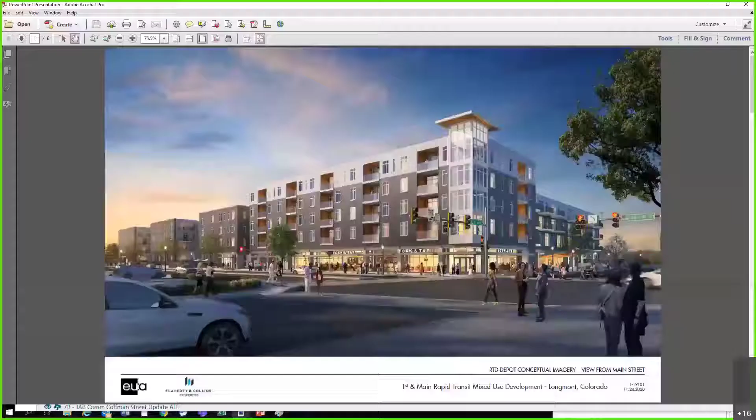So what you received was a packet showing some examples of how we would like to see the development. What we are proposing is that the parking garage actually would be wrapped by residential and/or commercial development, a mixed use project. We have been talking to prospects in regards to that, and this just represents one vision of what possibly could happen at that particular location.

So we'll go through them real quick. This is a slide if you're looking to the southwest at Main and First. Next.

So as you noticed on that last slide and this particular slide, basically you do not see the transit facility. It would have ground floor commercial.

This slide shows what it would possibly look like along Coffman Street. And as you note there on the ground floor, you can see the bus facility that is embedded into the development project itself.

Next. This kind of gives you an aerial view of how the parking garage would work in relationship to the development. Just another angle.

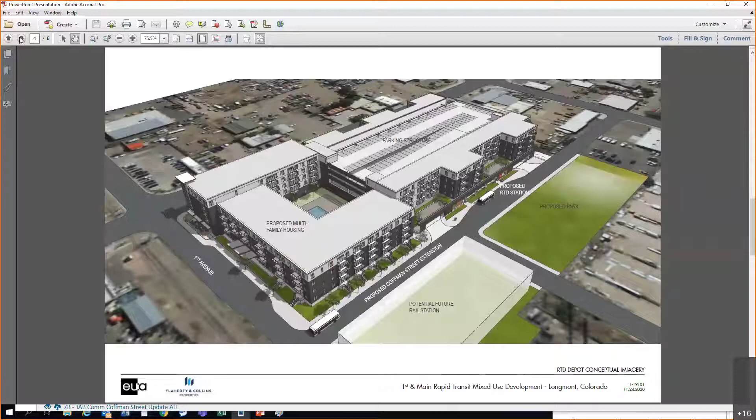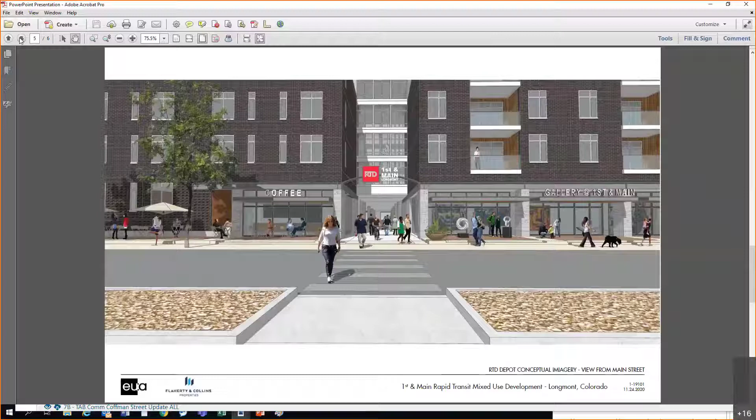And this actually is a section of Main Street showing a midpoint crossing where there would be a portal where you could get to the bus terminal without having to go to either First Avenue or Boston. You could actually enter at midpoint in the development itself. And that's just another perspective of what that might look like.

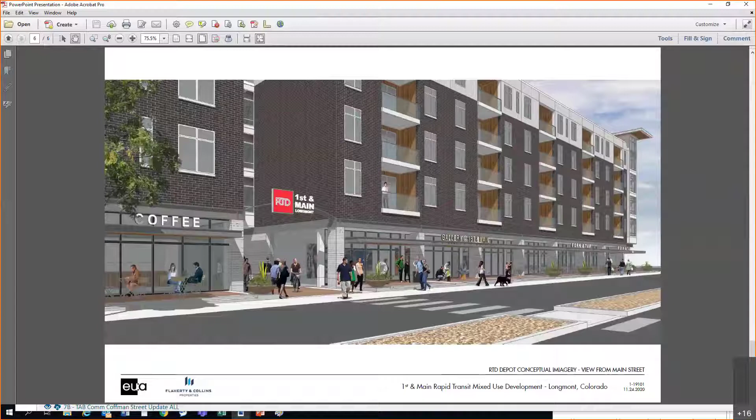Next, that might be it. So Tony's getting rid of all the traffic on Main, which is nice too.

Just kidding. Well, under this scenario, apparently we don't have parking either, but part of the plan would be to reinstate parking on both Main Street and also provide on-street parking along Coffman Street. So that just gave you a perspective of what we would like to achieve from a city standpoint.

We believe it's very important that we don't end up with a standalone parking garage, especially in the redevelopment area around First and Main. Our interest is really stimulating new development activity, and we believe that this particular project could basically serve as a catalyst, in conjunction with the South Main Station project that was more recently completed, to really drive the progress of development in that corridor.

So with that, I'd be glad to answer any questions you may have. David, I think you were first there. He's on mute. You can unmute yourself.

I'm looking at the slides that are looking down where it shows the railroad tracks, and I thought that this was going to somehow incorporate the railway, but it looks like it's completely separate. Is that true? You mean the future rail track? Right. Yes, so a couple of factors.

I see Tyler's bringing it back up so you can see where the future rail station is, up on that right side. Right, and that's part of that whole loading area for the rail and how it incorporates back to the parking garage as well. So there's a proximity that RTD has to have for the future rail to be close to this station as well, so we worked with them on that to try to get that proximity.

And this slide shows First Avenue going west. Yeah, actually, when the rail comes, it would occupy those lanes that are currently vehicular lanes.

So the rail station would come right up to the tracks. Yes, the rail actually comes off the tracks for the commuter portion, and it ends right in front of this potential rail station, right before Coffman Street. We didn't want to block Coffman Street with the rail because we need that for our bus rapid transit section, which I'll talk about in the next segment.

And at this point, all of the road, the railroad, and the bus transit are all considered at the same grade. Yes, well, we don't know the final design on the rail platform itself yet. That's to be determined at such time they get to that point.

Okay, that's all I have. Thank you. Great, thanks. It looked like Sandy had a question.

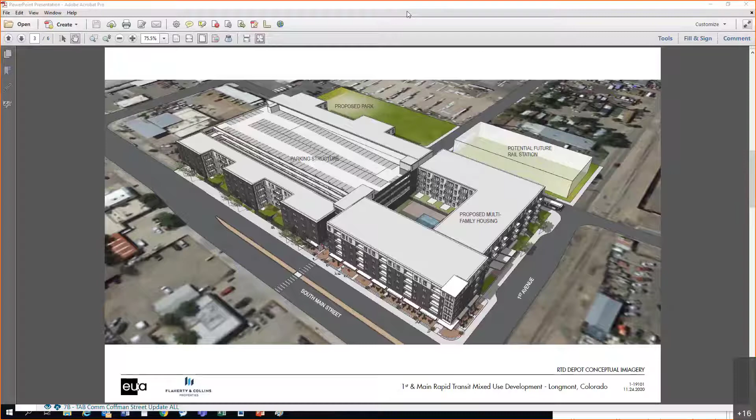Neil, if I could just jump in. I'm curious to know if we have any idea how much it's going to cost and how it's going to be paid for. The $17 million or 16.2 is not going to take it to fruition.

So, like I mentioned, the infrastructure master plan is giving us some cost estimates. The preliminary numbers we received a couple weeks back are that it's going to be in the range of about 23 million total. So if you took out 17, we're effectively looking at the city having to identify 6 to 7 million in resources to cover that differential.

Now, the other factor is, though, if we were to build additional parking spaces beyond the 200, that's an additional cost on top of that. However, that's one reason it's important to pursue a development project, because they would be able to use those spaces and help pay for them.

So the final numbers we don't know exactly. The city will have to make a significant contribution, but hopefully we'll be looking at a variety of funding mechanisms. We could look at capital improvement funds, the CIP program, general bond issues possibly, and another avenue is through the Urban Renewal Authority and its ability to utilize tax increment funds, which are effectively the taxes generated by a new development project.

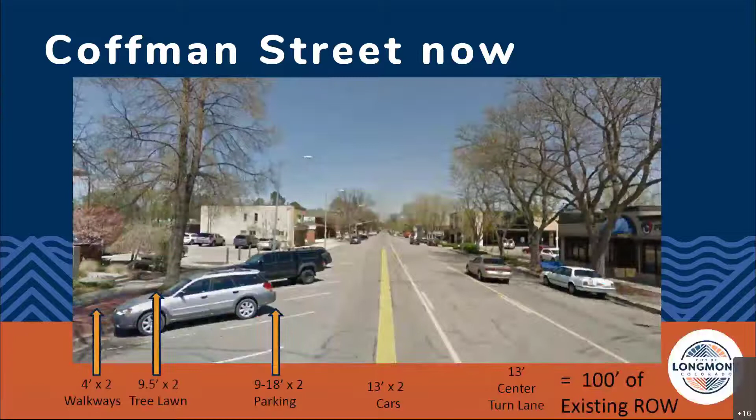You know Coffman Street now because we live it. I don't know if many of us have been out lately, but most people know about Coffman Street, one block west of Main Street. We're talking about from 1st to 9th, basically. Actually, the whole project will go up to 11th for buses, but the bulk of the construction piece is going to be from 1st to 9th Avenue on Coffman Street.

And so right now we have walkways that are pretty narrow. We have a pretty wide tree lawn for most of it, and we have the parking—it's both diagonal, you'll see the diagonal on the left side, and on the right side you see the parallel parking, so that parking width varies. There's also very wide lanes for automobile traffic and a very wide center turn lane as well. So that all fits within about 100 feet of existing right-of-way today.

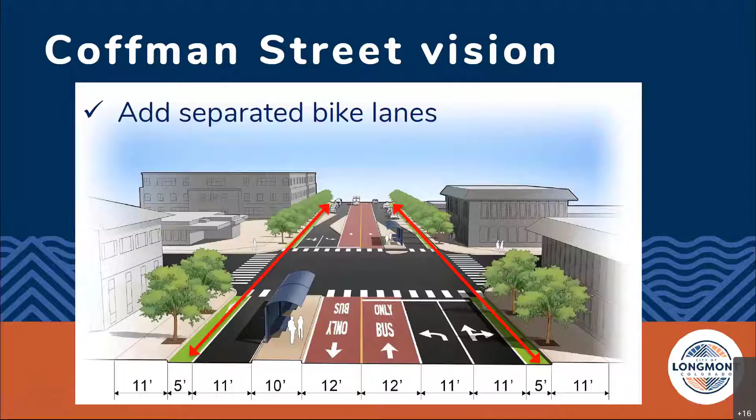What we plan to do—and this may not be the final look of this, but this is the initial design, the very early work—is talk about, at some point, needing to have bus lanes as part of this project, and those have been envisioned for the center of the roadway. We also have to do separated bike lanes, and those are bike lanes that will actually be probably vertically separated from the roadway. They'll likely be up at the sidewalk level, but again, that depends on how much the design goes through.

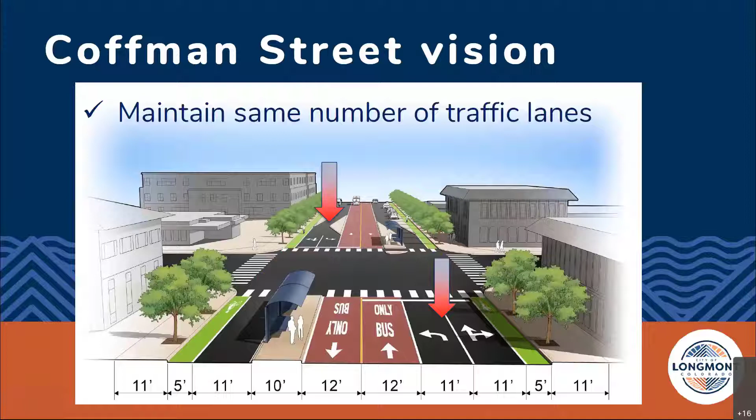And we're talking about maintaining the same number of traffic lanes, so nothing will change as far as the existing traffic and the capacity for that traffic. And then we want to accommodate, obviously, the trees and some of the parking, and you'll see that up on the very top of the slide there.

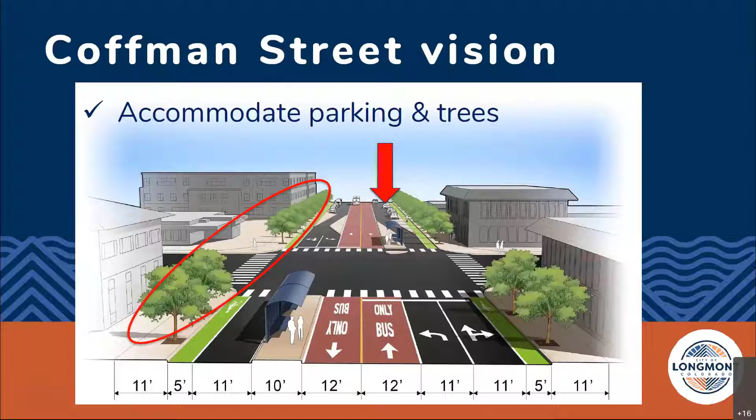Parallel parking where we can fit it, and then really keep the tree canopy and some of that green look in the corridor that we have today, but it's kind of hodgepodge and mixed up throughout the corridor. We have some really great places where it's green, and this is really trying to keep that tree canopy throughout the corridor, and enhance those pedestrian connections.

They kind of vary from 4 to 8 feet right now. We want to make that consistent along the corridor. So those are the things we're trying to do.

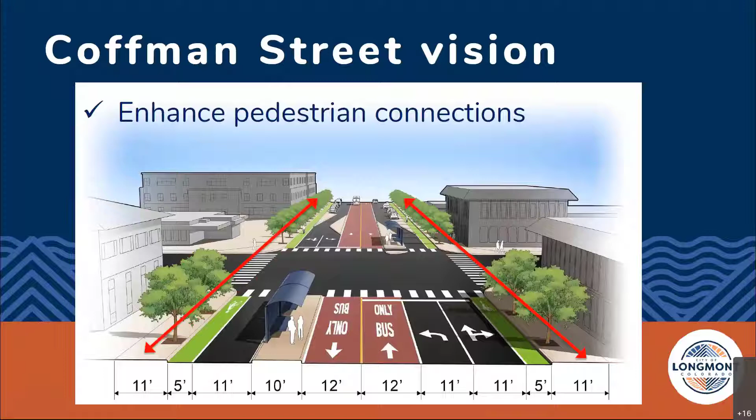This is really starting in 2020 at the very end here, so we're just fitting it in. We're still hoping to complete it by mid-2022. We'd really like to get construction going soon thereafter once we're done with the design. But there's a lot of issues with timing for going out to bid on construction projects, so we're trying to be cognizant of that. We're hoping opening day will be in later 2023 or early 2024, but that's a pretty aggressive schedule, so we'll have to talk about that as well.

The funding sources go back to the Denver Regional Council of Governments, or DRCOG, and a TIP Transportation Improvement Program award that we won by going out to a competitive process with the rest of the region. We got $750,000 for the final design, and just over $6 million for construction, so total project costs were $6.9 million.

You'll see the city's matching dollars, which is a pretty low amount—$150,000—to get basically $6.75 million. Anyway, that's it for my presentation.

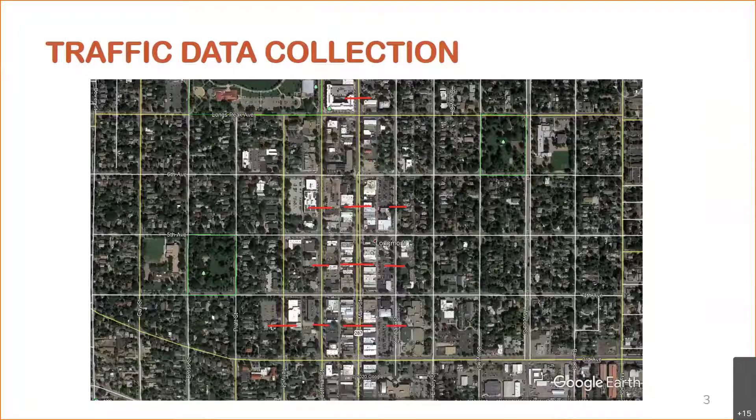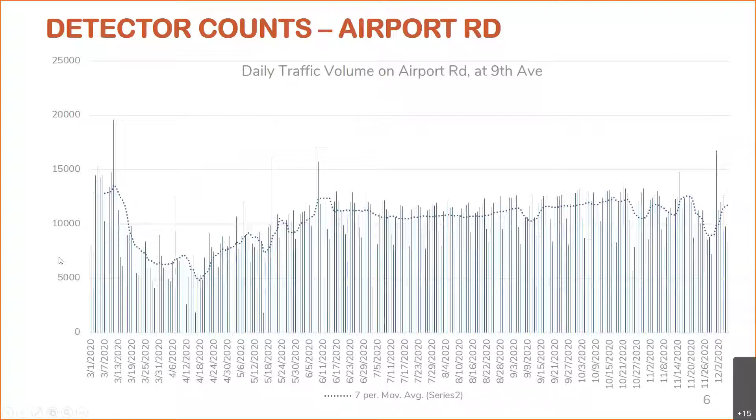One of the things we also measured was travel times. That was pretty important, even though the capacity is down - are we seeing that Carmageddon I mentioned before? Are we seeing major delays show up on Main Street because of this?

We were measuring travel times between 1st and 9th Avenue on Main Street, both north and southbound, throughout the day, through the AM, noon, and PM peak hours. I think where we really saw the biggest increase in delay was northbound in the PM peak - an extra minute of delay, so about 4 minutes travel time from 1st and Main up to 9th and Main. But really where that delay was coming in was at 3rd and Main.

I think that would be an opportunity if we're looking at how to do this again in the future and how to make it work better - that would be an area to focus, really 3rd and Main. Southbound, quite frankly, we didn't really see a lot of increase in travel time through any part of the day. It was pretty consistent, about 3 minutes from 9th down to 1st throughout the duration of the lane closure, before and after as well.